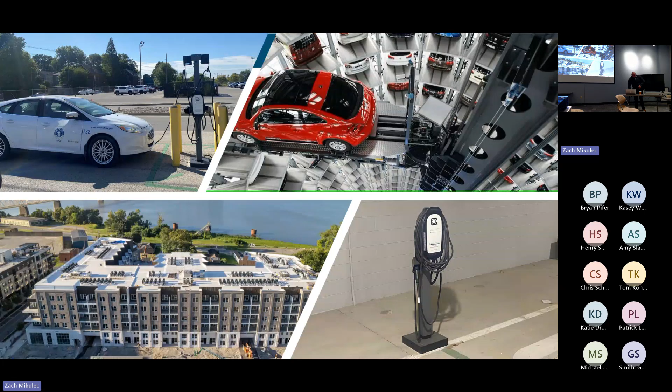So real quick, if we just think about what we have on us right now, how many batteries do you think we have in the room? Everybody's got probably at least 2 or 3 on. So how many people are in here? My Kentucky math is off, somebody had to do it for me. It's probably like 50. Small ones, right? We'll talk about the different types of batteries in a second. We've got quite a few in here.

One thing that Cincinnati, we practice, you know, this is insurance 101. We practice a lot of risk avoidance when it comes to lithium-ion batteries. We won't entertain lithium-ion battery manufacturing. We won't underwrite it. We won't touch energy storage systems, recycling. That's just stuff we're not going to insure. We've just chosen to do that.

Will that change? Who knows? Especially as this topic evolves, especially from a suppression and control standpoint. I don't know if that'll change. It might. When you can underwrite a dynamite factory, right? If it's well controlled and they think you get enough rate, you can underwrite anything. But we've chosen to avoid that. That doesn't mean we're immune to loss. I know you're insurance folks, everybody knows what lessor's risk is.

So think about your big commercial parks here in Grand Rapids. Just a big commercial park with these big concrete tilt-up buildings, right? A lot of these are 500,000, 1 million square feet. You got 2 or 3 demising walls in these things. You got multi-tenants. We insure a lot of those. That means we're just insuring the building, right? We don't necessarily insure the tenants. But you never know what they're doing on the inside, right?

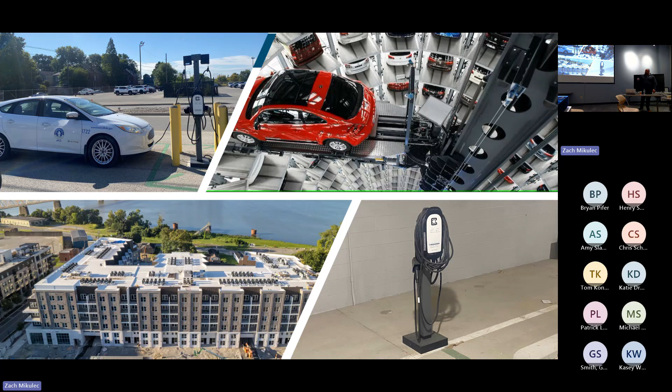So I just threw some pictures up. We know this, right? We'll talk about car stackers here in a little bit, but we insure a lot of habitational, a lot of high-rise hab. That includes parking garages, sometimes below grade, which presents some unique challenges. But this stuff is everywhere. I would venture to say our garages at home, some of us have got that. I do, right? I've got my leaf blower, my weed eater. I'm not doing gas anymore. My yard's not big enough to justify it. It's just too easy, right?

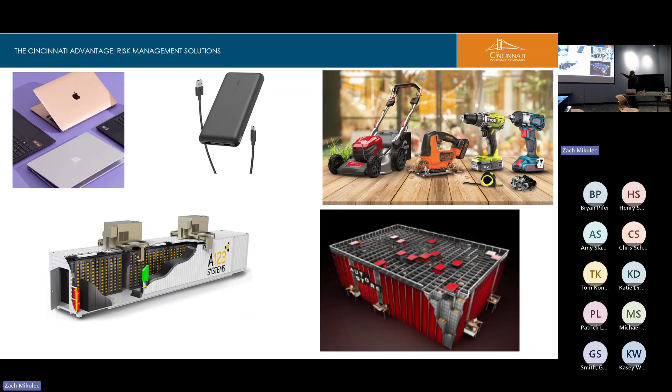So this is an energy storage system. We know what the ones up in the corner are. This is an automatic retrieval storage system. We're going to talk a little bit about that. So are all lithiums the same? These are different types that we encounter in the field or that are out in the wild, right? For my purposes, when I'm evaluating the risk, regardless of what these are, they're all lithium-ion. That's how I'm treating these. They have different makeups, different uses, different applications, right? Does anybody know which one is in your iPhone?

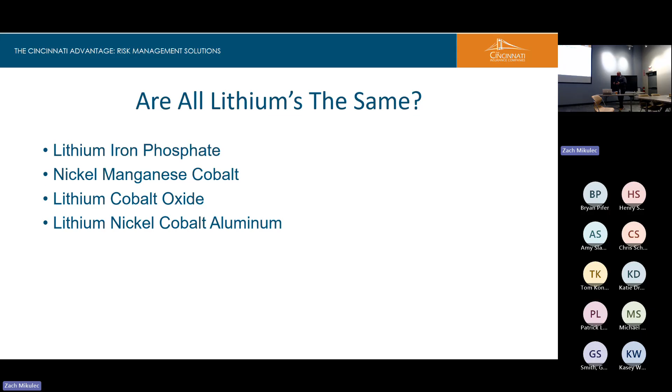These are the three predominant shapes that we have. Cylindrical, prismatic, and pouch. This is what you typically see in any type of lithium-ion battery cell. Cylindrical is going to be the most common. You're going to see EVs, power tools, laptops, believe it or not. You got prismatic. The shape of that really helps where that goes. That could be in some EVs as well.

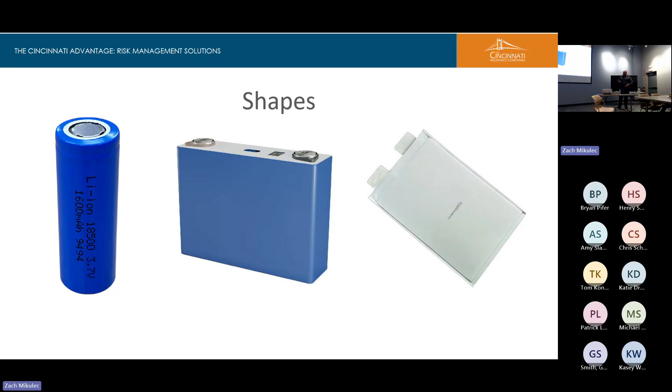Then you have pouch. Pouch is what you see in mostly low power devices, remotes, hearing aids, stuff like that. So they're all lithium-ion batteries and all have different applications. But the guts of these things and what can go south are all the same. Okay? Again, we're painting with a broad brush here.

This is the inside of the lithium-ion battery and what it does. Anode, cathode, positive, negative charge. You have an electrolyte in the middle of the stuff, and that's kind of the nasty part. We're not talking about Gatorade, right? You have these lithium ions, which are typically lithium salt, pass through. So you have a separator in between that, which is typically a porous barrier.

It's like a thin membrane. It's typically plastic, like a polypropylene. It allows these ions to pass through. And these charges prevent those from going from one side or the other. That is the setup of any lithium-ion battery, those individual cells, okay?

What happens when these things fail? The separators can fail. Everybody heard of thermal runaway, what that is? So when these things get damaged, you get thermal runaway. So you have a failure for various reasons. Physical damage, right? Every time you drop your iPhone, anytime you drop your iPad, your laptop, guess what? You have a potential for damaging that.

Now it's in plastic, it's encased, much like power tools. You got a warehouse full of power tools. You got lithium-ion batteries in plastic casing. You have them packaged in corrugated boxes, maybe with corrugated separators in between. That's a little bit easier to protect versus a warehouse full of individual cells like the cylindrical thing we saw.

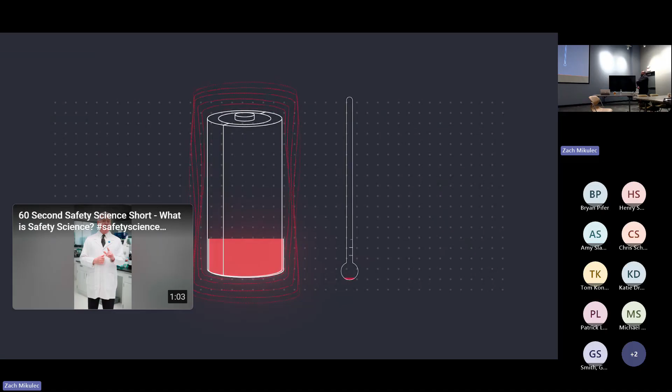When the temperature rises at a rate greater than 20 degrees centigrade per minute, the cell has reached thermal runaway. Thermal runaway can result in extremely high temperatures, violent cell venting, smoke, and fire.

Has anybody been on a flight where they've had an issue with a laptop or a tablet? I haven't either, and I fly a lot. I hope I never do. Because they can't get it off the plane, right? So they're probably gonna put it in a fire bag and isolate it somewhere, because these things gotta burn out.

So this is an EV. Anybody seen what the actual EV batteries look like? Heavy. I think the Tesla Model Y has almost 4,600 individual cells in these batteries. So you got individual batteries that go into modules, and they go into a pack like this.

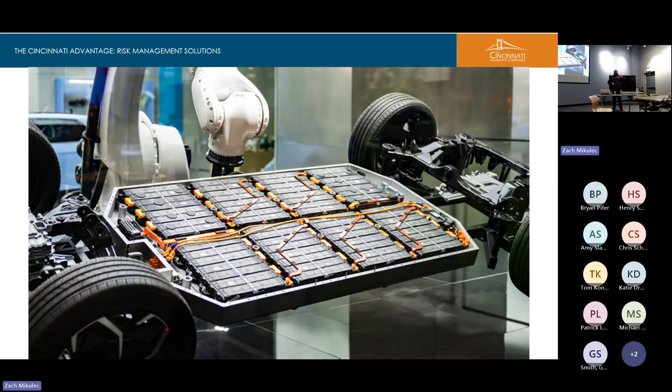I think it was estimated the amount of EVs has more than doubled since 2020. And we're supposed to have over 60,000 EV chargers across the country right now, which is a lot. So it's typically not the charging that's the problem, it's the batteries, right? One thing you can take back to your folks: the biggest risk with this is when it's charging. That's when you're at risk, when you're charging your lithium ion battery. Cell, module, pack. Obviously, the more we have, the more risk we have to catch on fire.

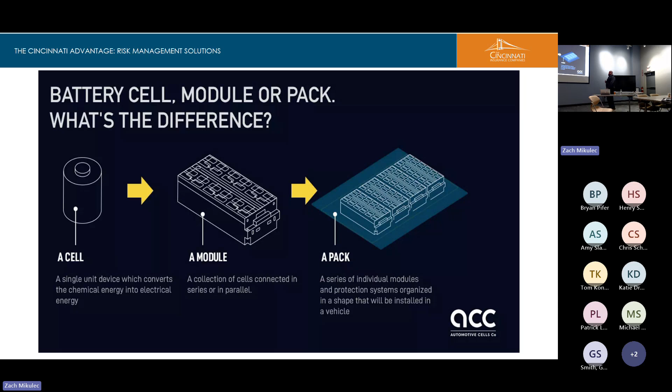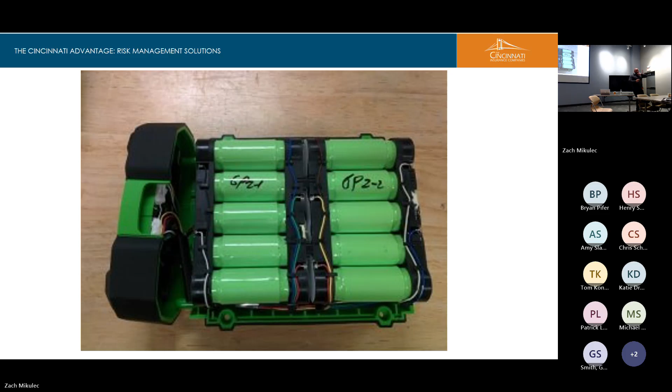This is the inside of an Ego 56-volt battery. This is the battery I had on. So you can see the individual cells. So we talked about thermal runaway. It gets damaged if you drop this. Maybe you've left it outside in the heat and charged it outside. Maybe it came defective. Maybe when you're charging it, you notice it feels really hot. Maybe you got a funky smell. Probably shouldn't keep using this thing. You probably need to get rid of it and chuck it, even though they're expensive, right? I get it. But they do last, right?

Okay, quiet. So we'll talk a little bit about some things we can do at home to protect ourselves. For anybody that's got kids at home, my daughter likes to plug her iPhone in and shove it underneath her pillow and let it charge, and that's a no-no, right? And telling a 14-year-old something over and over, sometimes it doesn't stick. But that's stuff we can do that we take for granted, right?

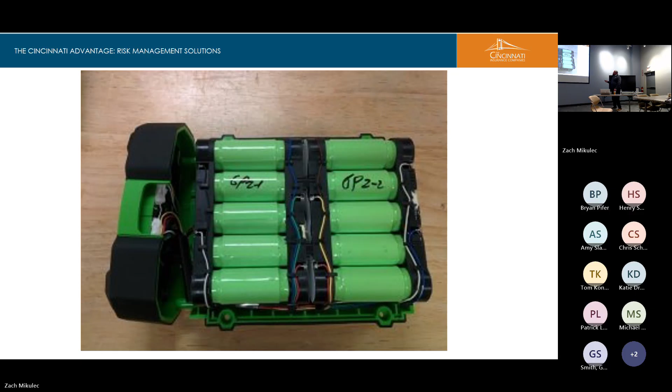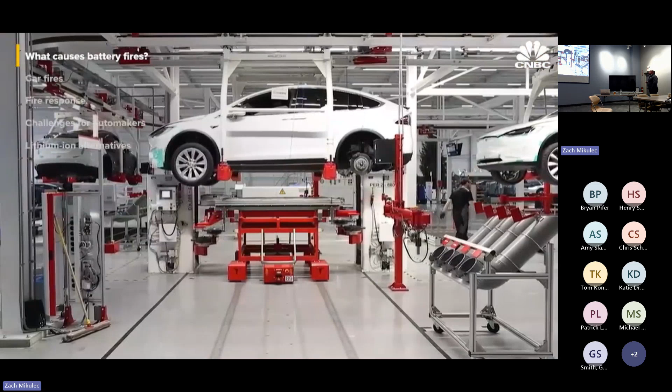Over the years, lithium-ion batteries have seen significant improvements in energy density, and while this has enabled more powerful batteries, it made them more vulnerable. You had to do lots of things to optimize it. One of them was to reduce the space between the two electrodes. But as you get closer and closer to each other, the chances of a short increase.

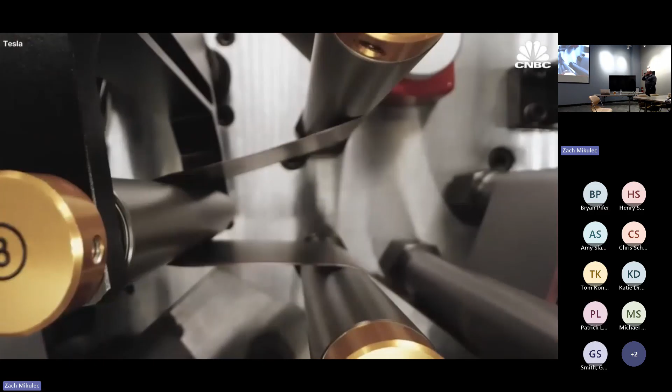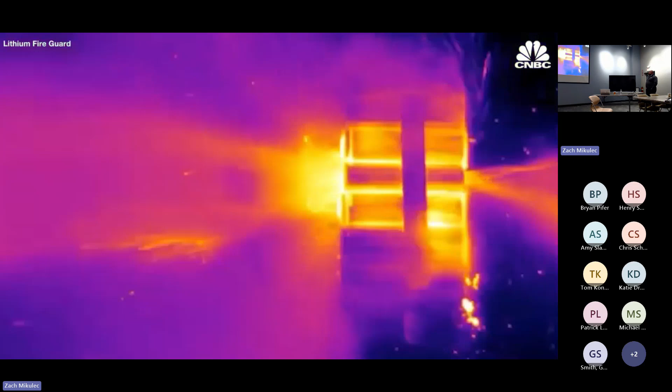A key ingredient in batteries is liquid organic electrolyte, but it is also one of the most flammable. Liquid electrolyte, like gasoline, is a flammable liquid, and it could get into what's called a thermal runaway situation, where it just starts boiling the liquid, and it results in a fire.

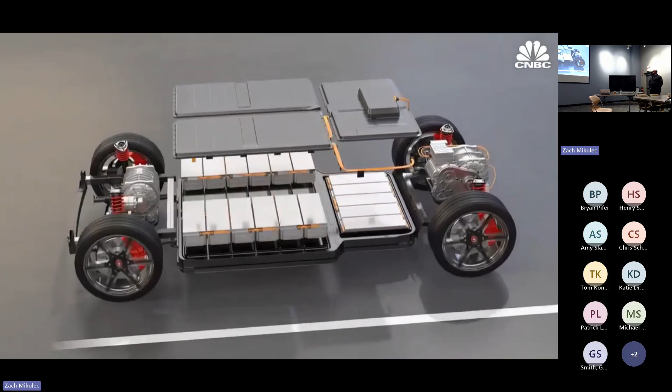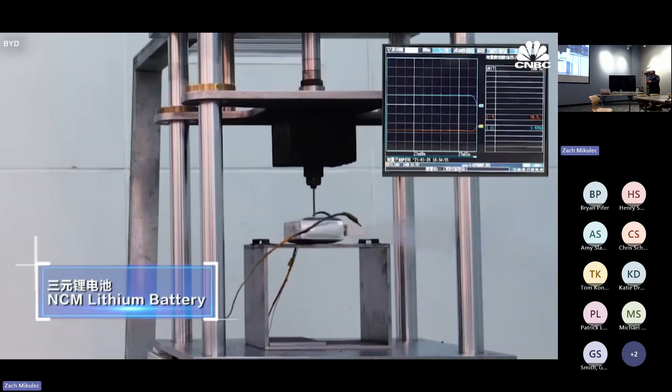Today's batteries are very safe, and for large ones, such as those in EVs, cells are meticulously controlled through a battery management system. That has to maintain the right operating temperature for the battery. Then within that operating temperature range, the other aspect is how fast it charges or discharges. But there are rare instances where defects or damage cause issues. We don't know the exact frequency of failure for lithium-ion cells. We assume it's somewhere between 1 in 10 million and 1 in 40 million.

Battery electric vehicle fires can happen due to defects in the actual battery cells or in the pack architecture. The battery pack design matters, and so does the quality of manufacturing. And when they're fully charged, that's when they're the most dangerous. Think of it as a fuel tank. If you have a fuel tank in a standard combustion engine and it's completely full and you develop a fire, you have a lot of fuel load, you have a long burning fire. It's the exact same concept with batteries. The battery problem is unique to electric vehicles, but non-crash fire risk is not unique to electric vehicles.

Unless that vehicle fire is next to a building or anything that's significant to life safety or other folks, they're gonna let it burn down. There was an actual fire in Baltimore on an on-ramp. I think it was a big SUV. It was over 40,000 gallons of water just to put it out, and it was hours. Imagine what that's gonna do to traffic, right? So when these things catch fire, they've got to let them burn.

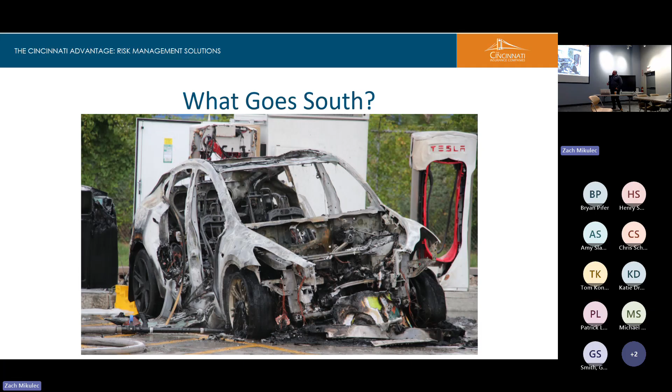This is in California. How did we skip that, Ed? It's a good question.

A developing story in La Habra, 2 electric cars were destroyed after catching fire overnight. It happened about 2:30 this morning near Greenbrier Lane and Imperial Highway in La Habra. Both cars were parked in the driveway of a home. It appears one of the vehicles was plugged in and charging. The flames did not spread to the garage or the home. Police tell us there are no signs of foul play. No one was injured. The cause is under investigation.

If that car had been out on the street by itself and not near a home or that other car, they would have done their best to control it, but you're not gonna extinguish it. So do you guys not insure houses where they have a Tesla charging in their garage? We do. It's the same as the questions you get asked, like do you have a dog, what breed is it? Do you have an EV? Do you have a proper receptacle to do that in? To answer your question, we do.

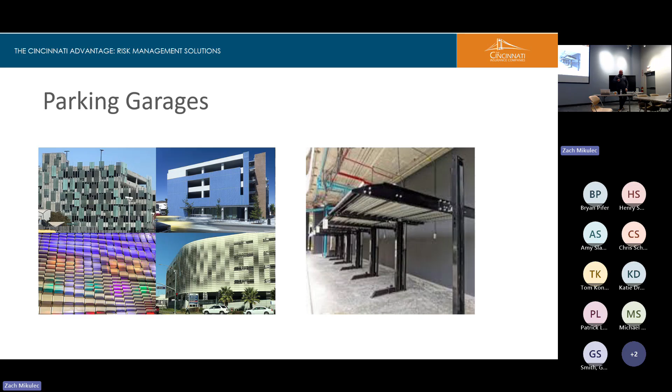Yeah, but below grade, for any of you that have EVs, if maybe you live in a condo or an office building, you see parking EVs below grade, maybe don't park there. Make sense? I know that's probably not what you came here to hear about, parking garages, but it gives you a little insight into what Kelly and I and the folks in the insurance industry are dealing with.

Any of you guys warehouse and distribute? Anybody have any of these automatic retrieval systems or floor robots or automatic guided vehicles? How are you guys from a maintenance standpoint handling these things? We have AGVs, but they're not lithium ion batteries yet. We're starting to get into some, but FM just came in and our battery chargers were in racks. So it's like you got to get your battery chargers out of the racks.

So these things are becoming more and more prominent in warehousing because it makes sense, because it's automated, it's smaller parts. You got these robots that are on top of these grids that basically pick these open top containers and pull parts, pull inventory. They're difficult from a fire protection standpoint because you see how they're open top. So think about it, we have a sprinkler head pop above that, what's going to happen?

Can't put sprinklers in. So we have a head pop above that because the robot gets on fire and is just running around like Johnny Five up there, right? You're going to have all that water pool in those containers unless they're vented. And most of them that come with these systems are not vented. They don't have holes in them. So you're not going to be able to get water to penetrate down through that system to extinguish or control the fire.

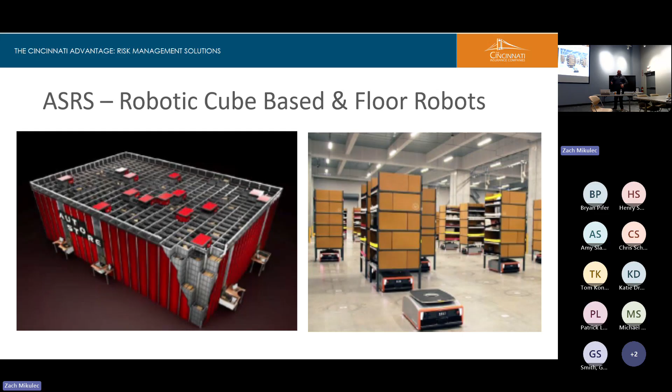Talk a little bit about e-bikes. It's the most sound, the most logical transition I have, storage to e-bikes.

Try pressing the down. I don't know. All right, we just have to let it play then.

Well, fire safety officials in New York City have a warning tonight about the dangers of lithium batteries. An early morning fire broke out at an e-bike store, killing 4 people. CBS's Elaine Quijano reports the fire quickly spread to the apartments on the upper floors. The deadly fire broke out just after midnight at this e-bike repair shop in Lower Manhattan. Firefighters arrived within minutes, but that's all it took for the smoke and flames to kill 4 people living above

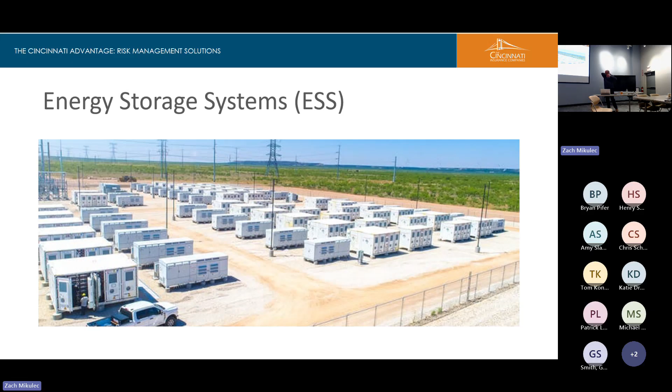This is what these look like on the inside. So these things can be as big as shipping containers. They can be as small as a motor control center, for anybody that does manufacturing that has any type of automated conveyance system. You see these? So this is what the inside of these look like.

So as you can imagine, going back to thermal runaway, you got these individual cells in these things. You get defects, you get overcharging, you get overheating, you don't have the right detection or ventilation. Most of these will have suppression systems in them. What's going to happen? The thermal runaway, the next cell catches fire, the next cell, then boom, we have a significant fire.

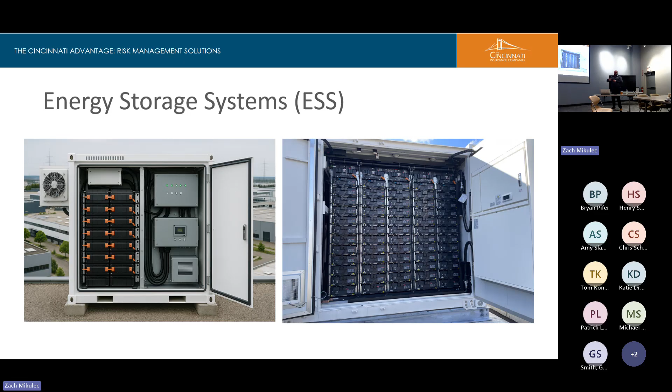So Moss Landing, California, this happened in 2025. And you can Google this and see some of it. I'm going to show you a video. It's pretty impressive what happened here. They did this expansion, I think to get like over 4,000 megawatt hours stored. This was like their first phase of a 5-year plan, and this is their older systems that caught fire.

So, and this wasn't their first incident. They had at one time an overheat, which triggered a sprinkler system, which caused an arc, which caused a fire previously. But this bad boy here was pretty gnarly.

If we get another commercial, I'm sorry. Oh.

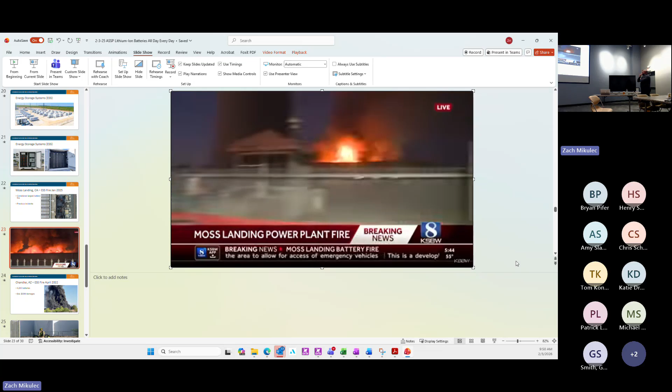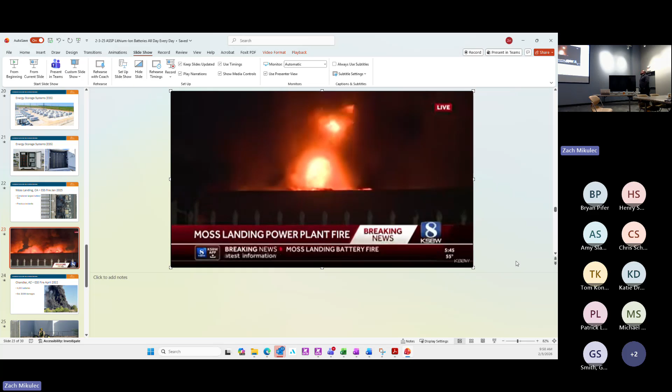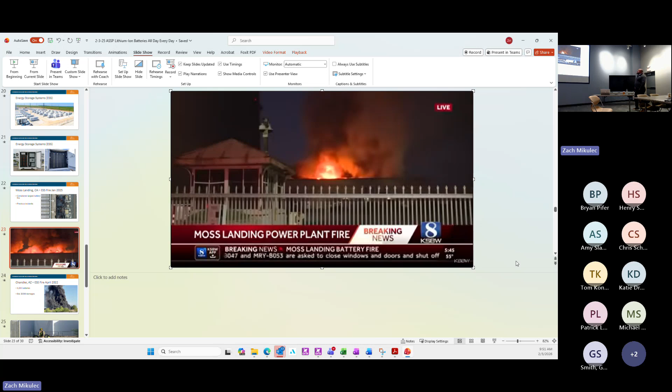And just a short while ago, now we have a lot of crews, sirens with flashing lights. Pan to your left. Salinas fire on their way. Okay, get back on the fire. Yeah, Felix, this is actually visible from all over. We've been told a short while ago that we're standing on private property. We've been told to leave. I'm going to have to find another vantage point, and I don't mind because honestly I don't feel safe this close to this facility. But look at that, incredible. It's Vistra. There's a natural gas facility, but this fire is burning in the battery storage area, which brings in a whole different dimension because we're talking about burning lithium-ion batteries, which can produce toxic fumes. That is why, Felix, they issued that order just a short time ago.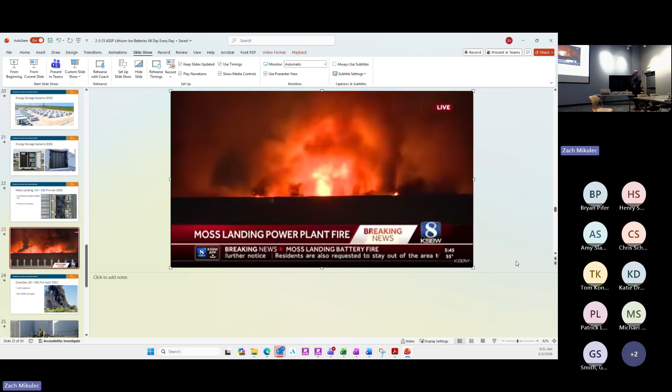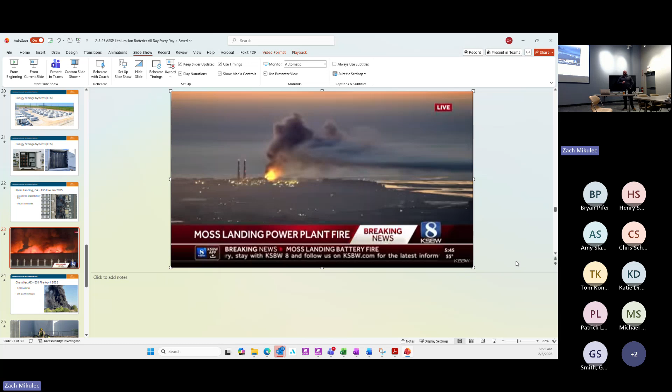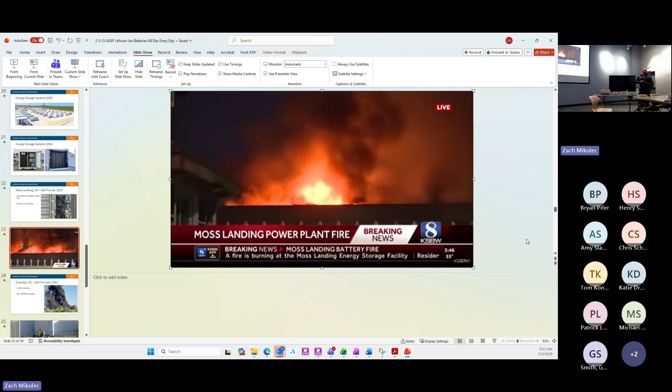Yeah, and as I say, just the extent of what we're seeing now, that cannot be an advisory. People, I mean, just looking at this, if I'm looking at this, I'm not going anywhere. I'm sheltering in place. I'm closing my windows, and I'm clearly staying away from this area as they are being told to do. Stay away from this area. I wouldn't be surprised if it's a matter of minutes before they close the highway, just to allow some access in here.

Oh, pan to your left, Andy. We got the hazmat.

Stuff, the same thing applies with extra ventilation or have some type of protection with it. It's probably smaller scale, right? This particular one was in a building, like a masonry non-combustible building with firewalls. Obviously, it caught all the containers on fire, through a roof, right? At that point, it's done. So I read somewhere that it was over 6 weeks that they used to put that out. How long did it burn for? A few weeks before they did it.

Now, let's also think about some unknowns we have with this. They did some testing with the Chandler fire, which were Tesla battery packs, of the amount of cobalt and manganese in the soil, the environmental impacts of where that stuff has to go. And people breathing that stuff on fire. We don't know what that's going to do right now, right? What is that going to do to people down the road, especially firefighters? It's not good. Logic would say that's not good.

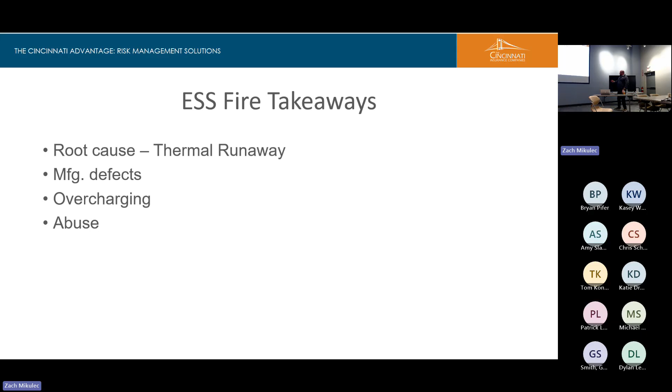So for construction folks, we do a lot of builder's risk in Cincinnati. I don't know if the rest of you guys are playing that market. So when we go out to a builder's risk job site, the two main things we're looking for are site safety or site security and your fire prevention plan. What are we doing to protect people from coming on site and sabotaging that? Include battery safety in your site safety plan, your fire prevention plan. It's one thing that's missed a lot.

So make sure that you have some type of checks and balances with your lithium ion batteries, visual inspection, make sure they're working, looking for defects. Job sites are rough and tumble, right? They're hard on tools. So make sure that there's no defects, and include that in your fire safety. I'd almost be more worried about non-construction, because a lot of times you're in an open environment.